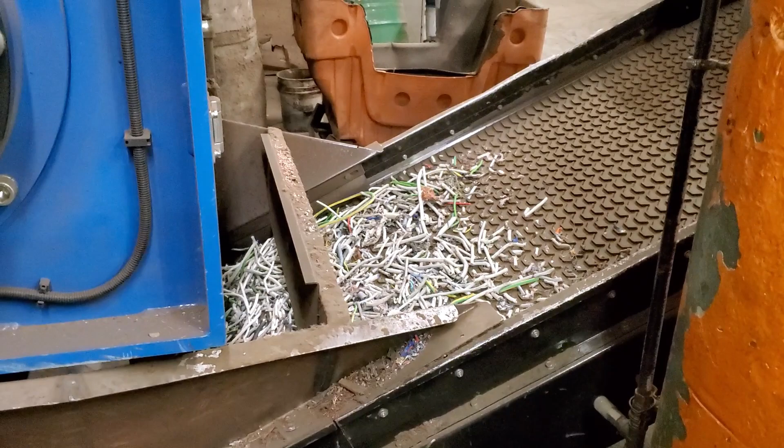Happy Friday. So today we are going to talk about processing low grade wire.

So there's a couple different ways of doing this, but there's a method that we've used and our customers have used over the years that works really good for low grade. And I'm going to just put some boxes there. I'm a terrible draftsman as usual, that hasn't changed, but we're going to put some different boxes and then explain what each of those boxes are through the flow. So kind of like a flow chart.

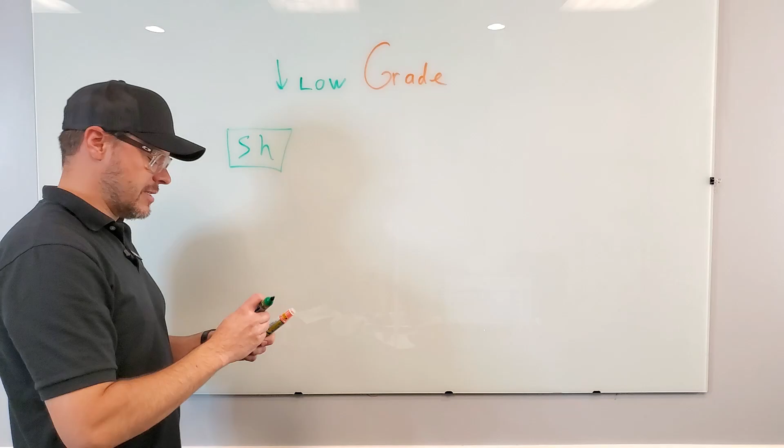So to start, when we're doing low grade, we almost always want to have a shredder, SH, and this can be a dual shaft, a single shaft. I prefer dual shaft or quad shaft if you can. And the reason for quad shaft is low grade has a lot of gnarly bad stuff in it. So if you're using a dual shaft or a quad shaft, and there's a chunk of steel or something else in there, it's not going to damage this shredder.

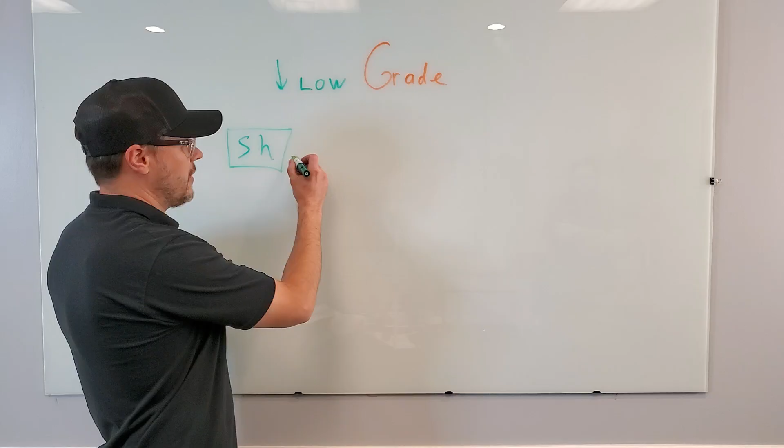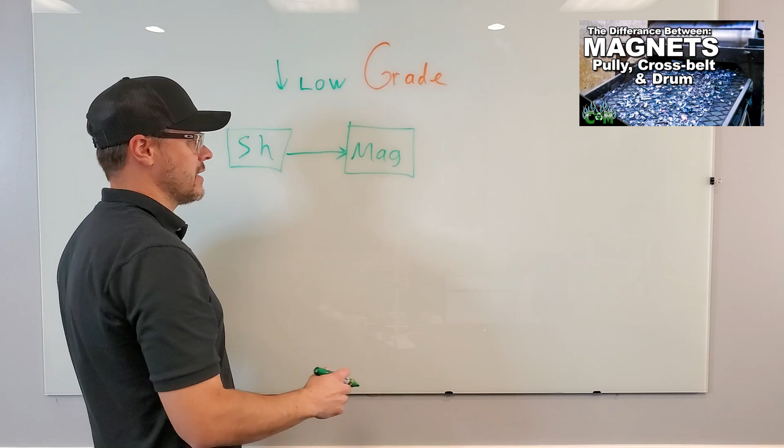So from the shredder, we go and we have a magnet. And in one of our other videos, we discussed the different types of magnets. In this one here, I'd probably use a drum magnet or a crossbelt overband magnet. I'll use one of those for this.

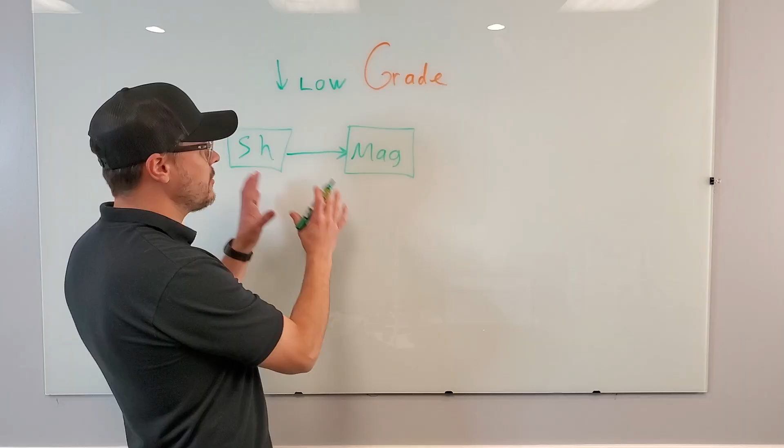So shredder, magnet. Now, after the magnet, we're going to want to go ahead and take that material and go into a mill. It can be a granulator, it can be a hammer mill or vertical mill. Typically, we like to use the vertical mill, and the reason for that is you might still have some steel trapped in. Low grade has a lot of brass. You end up with a lot of other hard materials. It can have stainless steel in it, stuff that the magnet didn't pick up.

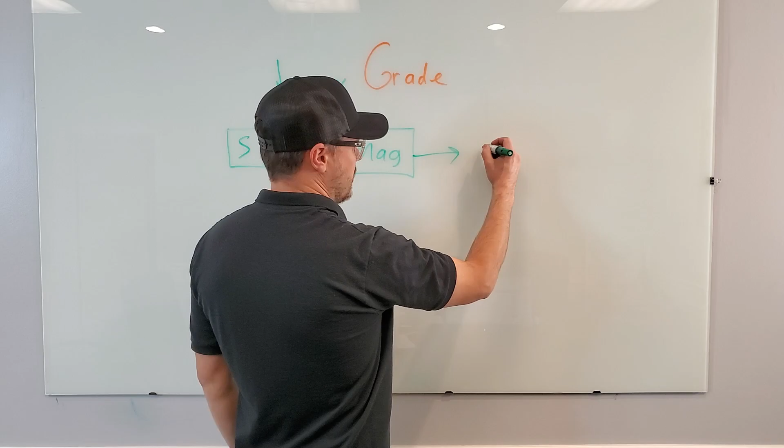So now you have these kind of more abrasive types of material that can beat up your blades. So a vertical mill is more forgiving. So I would go from there into the vertical mill, and the vertical mill is going to take your material and give you kind of a granular fraction.

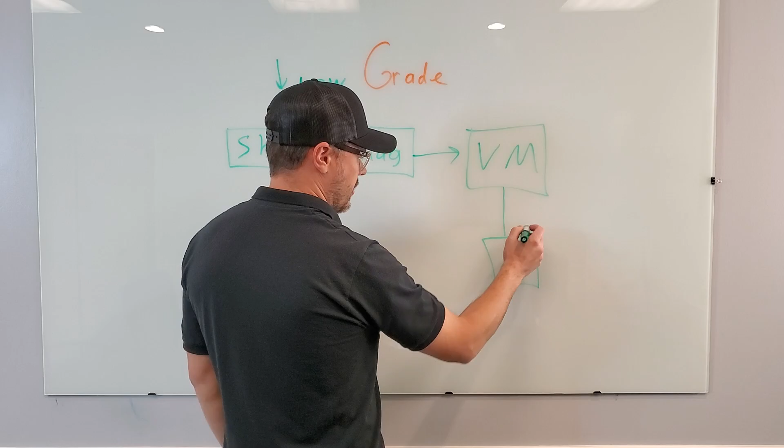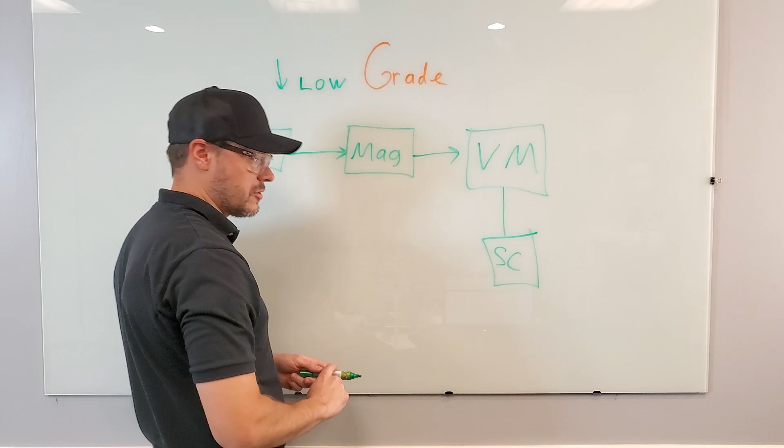Now from the vertical mill, you can go into a screener right away, and that is one option. And the screener, SC, will give you different fractions. So if you do have some heavy brass or heavy aluminum or something that got in there, you'll be able to scalp that off. So you'll be able to take your heavies, we'll just go H here, off the top. Now you can also do this using an eddy current. There's a couple different ways of doing this, but the cheaper way is just use a screener.

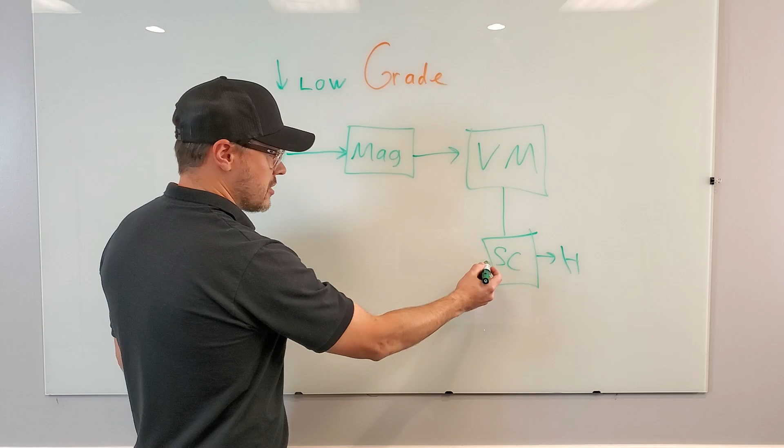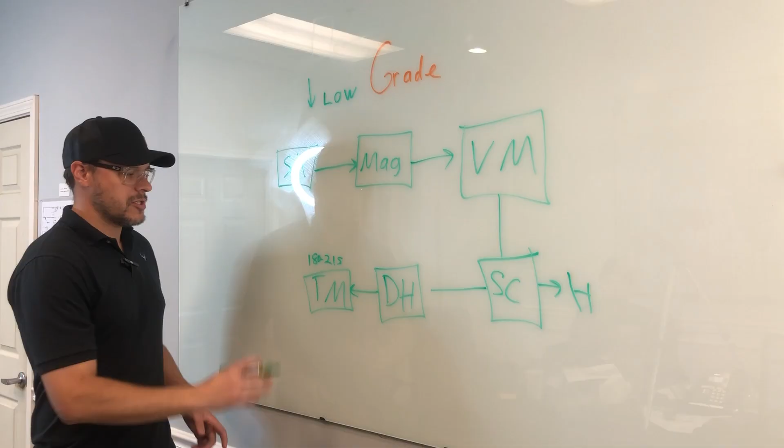So now your fines are going to go to a dosing hopper, DH, and you can skip this step and go directly into a turbo mill. However, we like to use the dosing hopper for a couple different reasons. All delamination mills and turbo mills work better under full load amps. So if this is a 200 horsepower mill, you're going to be running at about 180 to 210 or 215 amps. If you can get this thing to run in that range of amps all the time, you are going to have your best and more repeatable results. So your material coming out is going to look way more uniform than if it was going from 50 amps to 100 amps to sometimes 200 and back and forth.

The way you do this is by putting a dosing hopper in front of it, and then you can control how much material you put into the turbo mill. So you control the speed, and also this is automatically set in our PLC. Once this goes down below a threshold, this can speed up. You can do all the adjustments and play around with it as you want. Or you can have this go full speed, and then it's just a range. Once it reaches this, it just pauses it, and when it goes down below, it just turns it on. So a few different ways of adjusting that.

Now from the turbo mill, we go to another, I'm going to put it up here, another screener.

So we did a screener up here to remove the heavies. Now this screener here is to give you fractions. Now you can put a one deck in it, which will give you two fractions, right? The material that falls through that deck and the material that stays above it. Or you can go with a 2-deck screener, which will give you 3 fractions, the material that falls through the first 2 decks and the material that stays on top of your first deck.

So this will depend on budget and what is going on after. So for lack of space, we're just going to keep going down the middle here. So if I have 3 fractions, I want to go to 3 air tables. In some instances, if you have a really large plant, you might put another dosing hopper, and it doesn't have to be a large dosing hopper. It can be a small dosing hopper. We do have smaller dosing hoppers. Goodness, I can't make an H today. Smaller dosing hoppers, and then AT for air table.

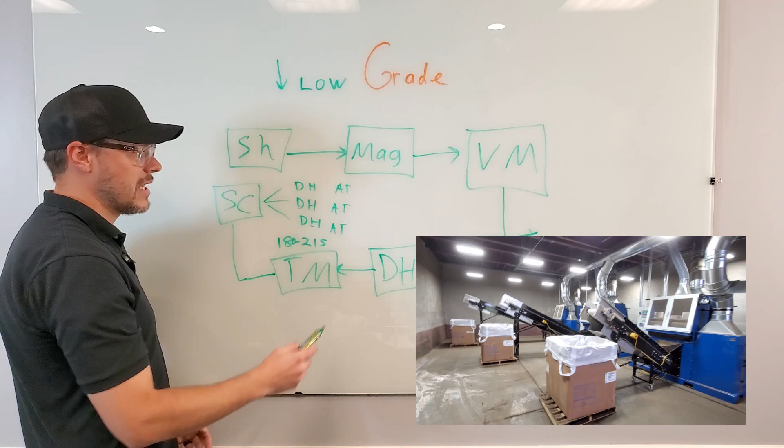And after the 3 Airtables, because it was for automobile type material, there's a lot of stainless steel, we had magnets. We had a conveyor with a magnetic head pulley, but it wasn't any regular magnetic head pulley. It was a magnetic head pulley that's ultra high Gauss, so a very high strength magnetic head pulley, and it's made to remove the stainless steel that's in the chop.

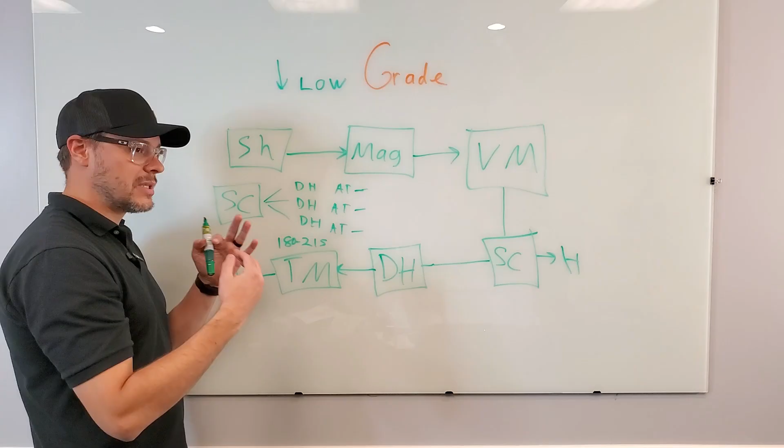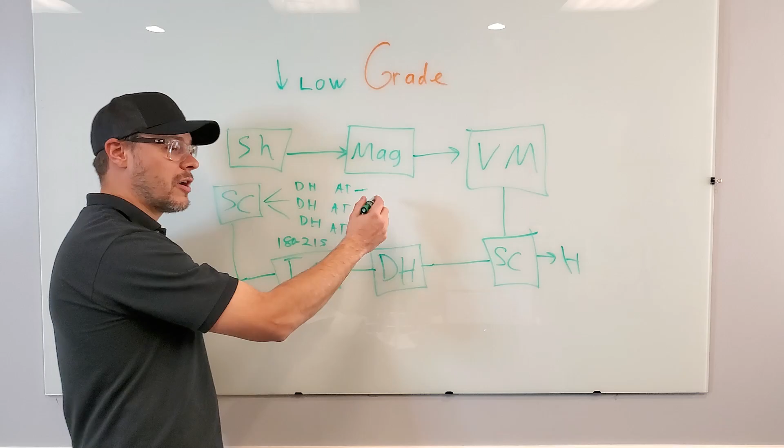So what happens is this: as material is going through the line and getting smaller and smaller, you will have non-magnetic stainless steel that is getting beat by the blades. Believe it or not, those blades and that transfer and that heat makes that material slightly magnetic. Not very magnetic. If you put a regular magnet up to it, it wouldn't do anything, but it's just slightly magnetic enough that if you have a strong enough magnet at the end, it will take that stainless steel and it'll pull it out. So hopefully this diagram isn't too convoluted and you understand what we're doing here.

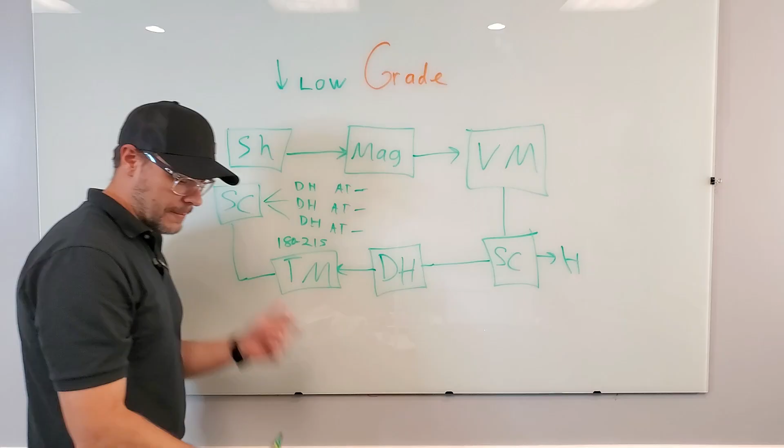But this here is how we would do the low grade wires, and it's also how we do other materials as well that are kind of the low grade category. If you're doing telco wire, you can do it the same way. Telco wire, however, does give you bare bright, and if you were to do this line and only do telco wire, I would change a few things. But this would also do telco wire. So we can also make another video talking about telco wire and how we'd set that up.

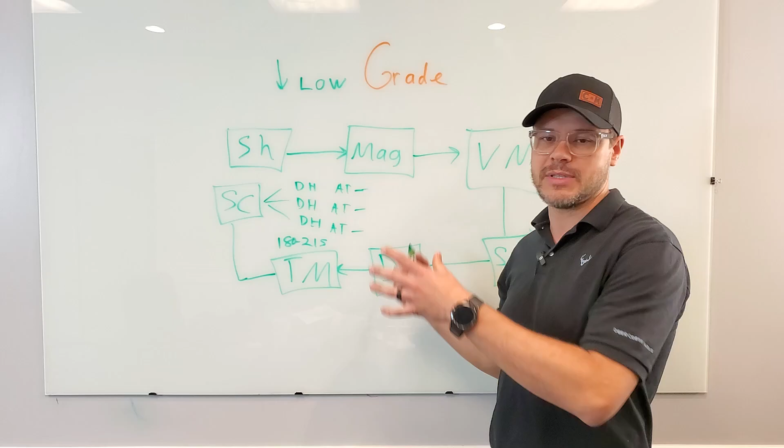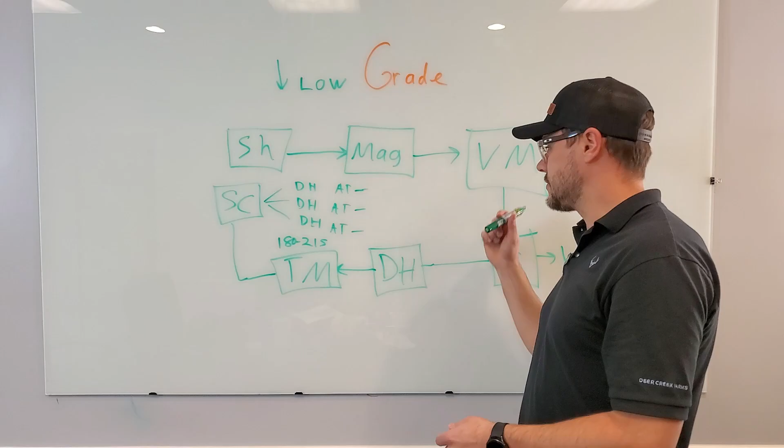But for low grade wire and for low grade types of wires or anything that would fall in this category, this is our typical setup. And we can do this on a very large scale or a slimmed down scale. And the larger scale has all the dosing hoppers and all the different magnets and stuff. But if you want to do this on a smaller scale, we do have some small vertical mills and some smaller turbo mills and some small Airtables that can make all this happen.